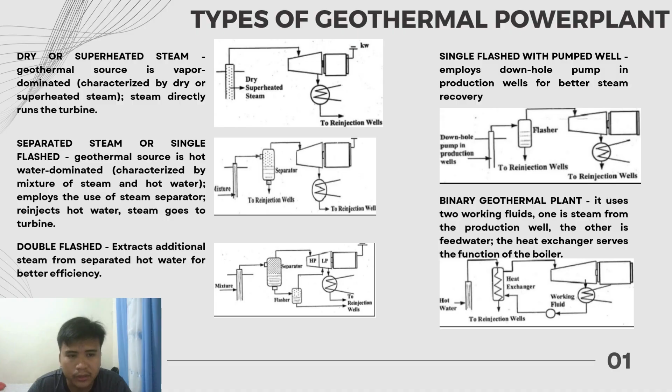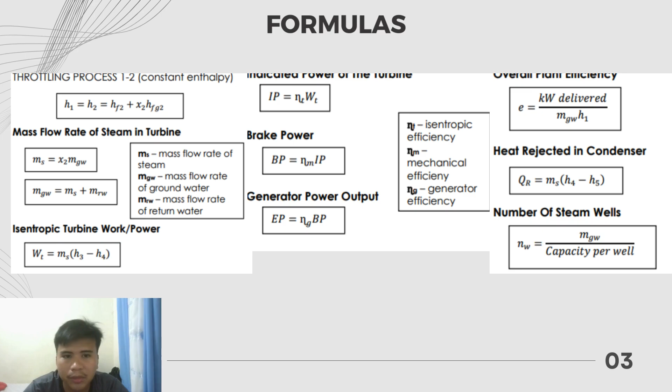For number 1, in a geothermal power plant, the mass flow rate of groundwater is 400 kg per second, and the quality after throttling is 20%. If the turbine power is 80 megawatts, what is the change in enthalpy of steam at the inlet and outlet of the turbine?

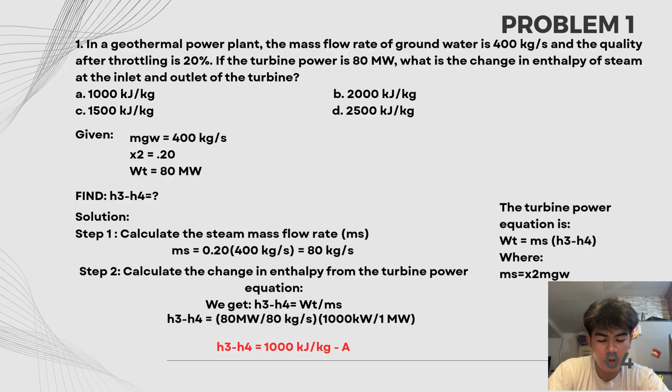Since yung kilowatts natin is kilojoules per second, cancel na lang natin yung seconds sa mga unit. E di magiging unit natin is kilojoules per kilogram. Tas calculate nyo na lang, may calculator naman kayo. Yung magiging sagot natin is 1000 kilojoules per kilogram.

A liquid-dominated geothermal power plant with a single flash separator receives water at 204 degrees Celsius. The separator pressure is 1.04 megapascal. A direct contact condenser operates at 0.034 megapascal. The turbine has a polytropic efficiency of 0.75 for a cycle output of 50 megawatts. What is the mass flow rate of the well water in kilograms per second?

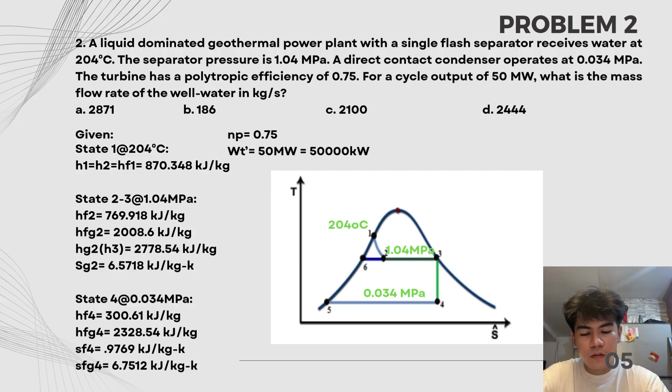Yung hot water at 204 degrees Celsius is mag-enter sa flash separator at 1.04 megapascal. Yung turbine power output is 50 megawatts at meron tayong polytropic efficiency na 75%. Pinapakalculate sa atin yung mass flow rate ng well water. Ayun yung mga given. Sa problem na to may steam table kayo para ma-interpolate nyo yung mga given values.

Yung una natin i-calculate is yung quality after the separator using the formula of throttling process 1 to 2. Tapos derive nyo lang para makuha yung quality after throttling. Tas substitute na lang, tas calculate. Yung magiging sagot is 0.05.

Next is yung outlet enthalpy. From entropy balance formula, pag nakuha na yung X4, gamitin nyo na yung formula ng outlet enthalpy. Same lang din yun sa unang formula. Yung magiging sagot ay 2,230.2711 kilojoules per kilogram. Next natin kukunin yung mass flow rate ng steam using the turbine power equation.

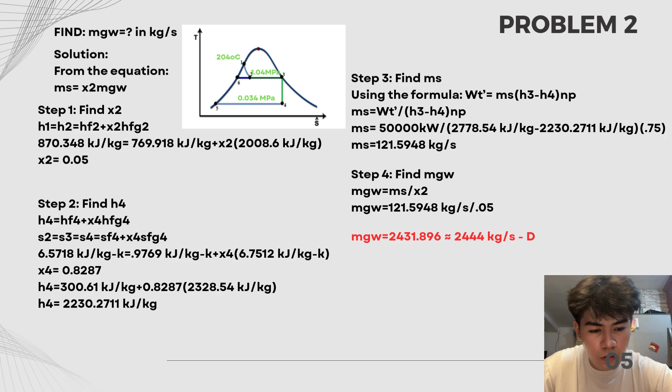Derive nyo lang para ma-solve yung steam mass flow rate. Yung magiging sagot natin is 121.59 kilograms per second. Kompleto na yung mga values para makuha natin yung well water mass flow rate. Gagamitin natin formula is yung sa steam mass flow rate. Yung well water pala, same lang din sa groundwater mass flow rate. Yung final answer natin is 2,431.9, nasa option D. Same lang din yan, basta malapit.

For problem number 3, a flash steam geothermal power plant is located where underground hot water is available as a saturated liquid at 700 kPa. The wellhead pressure is 600 kPa. The flash steam enters the turbine at 500 kPa and expands to 15 kPa when it is condensed. The flow rate from the well is 29.6 kg per second. Determine the mass flow rate of steam in kg per second.

So, first, analyze muna natin siya gamit yung TS diagram. Yung point 1 natin, underground hot water is available as a saturated liquid. Saturated liquid yung left part ng TS diagram, yung right part is the saturated vapor. At 700 kPa. Then yung point 2 to 3, yung flash steam enters the turbine at 500 kPa, kaya dun siya pumasok sa pressure line na yun. Then nag-expand siya sa 15 kPa when it is condensed, process 4 to 5.

For state 1 at 700 kPa, makukuha natin yung enthalpy H1 na equal din sa H2 kasi throttling process is isenthalpic, equals to 697 kilojoule per kilogram. For state 2 to 3, sa steam table ulit: HF2 is 640.09 kilojoule per kilogram. HFG2 is 2,108 kilojoule per kilogram. Yung HG2 equals din sa H3 kasi point 3 nasa saturated vapor line, so Hg na siya, equals 2,748.1 kilojoule per kilogram. Yung SG2 is 6.8207 kilojoule per kilogram Kelvin.

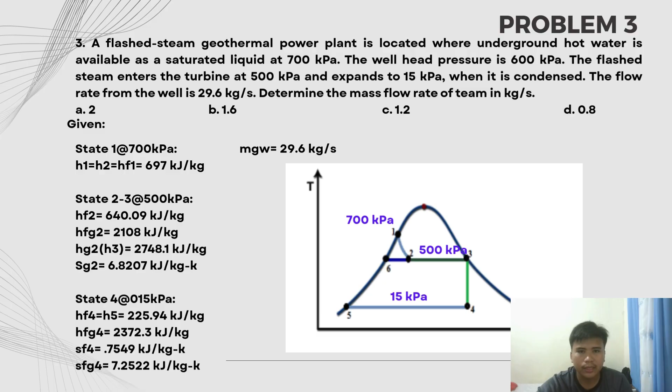So, di ba ang hinahanap natin is the mass flow rate of the steam. So, using the formula, mass flow rate ng steam is equals to yung quality ni 2 times mass ni groundwater. So, step 1 natin is finding the quality of 2. By using the formula, H1 is equals to H2 is equals to HF2 plus X2 HFG2.

So, substituting yung mga values na nakuha natin kanina, yung H1 natin na equals to H2, 697. Tapos HF2 natin, 640.09 plus X2 na unknown. Then yung HFG2 natin kanina na 2,108. Then makukuha natin dito yung X2 na 0.027. Since may quality na tayo, mahanap na natin yung mass flow rate ni steam.

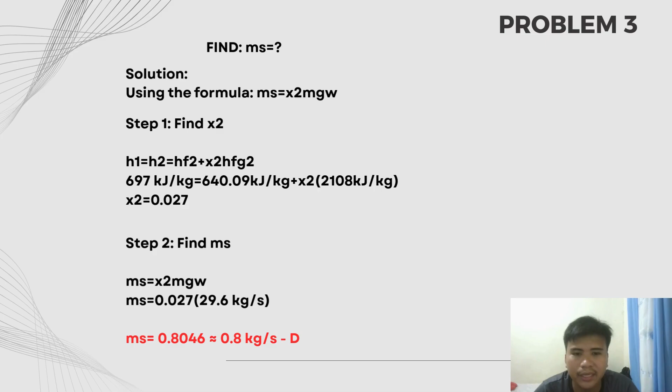Then substitute lang natin sa formula, 0.027 times 29.6 kg per second. Ang magiging sagot natin ay 0.8046 or almost equal lang din siya sa 0.8 kg per second or letter D. So, that's problem number 3.

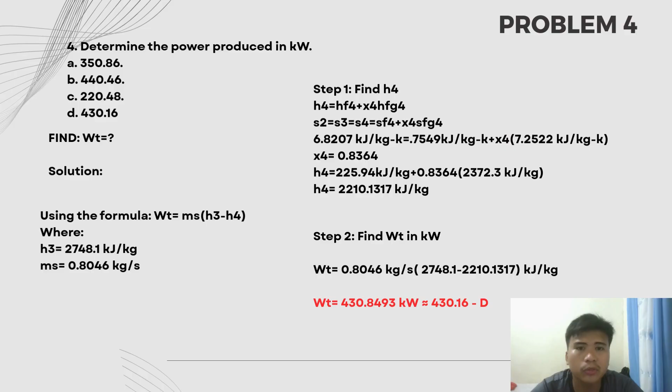So, kadugtong pala to ng problem number 3 kanina. So, may mga given na tayo doon and mga nakuhang values using steam table. Then, ang hinanap dito is determine the power produced in kilowatts. Power produced, saan ba napuproduce yung power? So, sa turbine, di ba? Work ng turbine.

So, for the formula of turbine, it is equals to mass ng steam times H3 minus H4. Yung H3 nating nakuha kanina is equals sa Hg2. Hg2 is the saturated vapor at 500 kilopascal. So, yung MS, yung nakuha din natin kanina na 0.8046 kg per second.

So, meron tayong MS, meron tayong H3, pero wala tayong H4. So, paano natin kukuhanin yung H4? Yung formula lang din kagaya ng pagkuha ng ibang enthalpy. H4 is equals to HF4 plus X4 HFG4. Pero, wala tayo ng X4, yung quality ng 4. So, magpuproceed tayo sa pagkuha ng X4 gamit yung entropy.

Pero wala tayong entropy ni 4. Pero pwede natin siya kunin gamit yung entropy ni 2 kasi equal lang si entropy ni 2 tsaka entropy ni 3. Since isentropic process siya, equal din siya sa entropy ni 4. So, yung nakuha nating entropy ni 2 is equals to 6.8207. Then, equals to SF4 na 0.7549 plus yung X4 na unknown, times SFG4 na 7.2522. Then, makukuha na natin yung quality ni 4 na 0.8364.

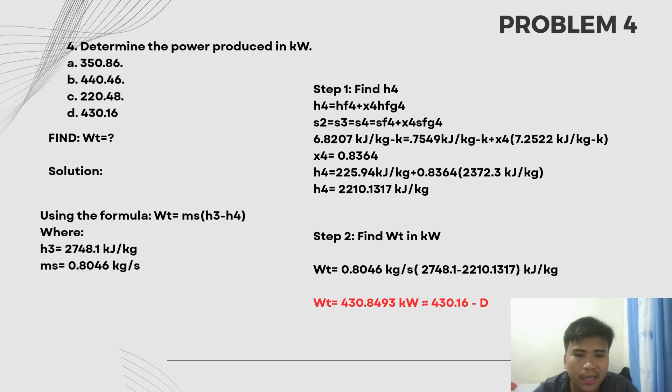MS is equals to 0.8046 kg per second times yung H3 natin na 2748.1 minus 2,210.1317 kilojoule per kilogram. Then, makakancel yung kg. Matitira yung kilojoule per second, magiging kilowatt. Then yung final answer natin is 430.8493 kilowatts. And almost equal din sa 430.16 kilowatts or letter D.

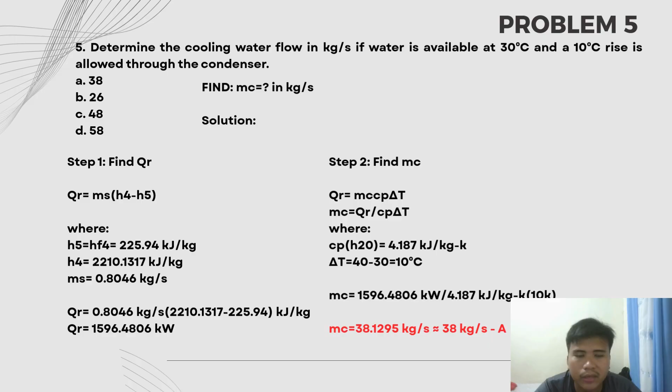So, substituting the value, MC is equals to 1,596.4806 kilowatts over 4.187 kJ per kilogram Kelvin times 10 Kelvin. Makakancel yung Kelvin, then makakancel yung kilojoule, matitira yung kilogram per second. And yung final answer natin is 38.1295 kg per second. And almost equal siya sa 38 kg per second. And letter A yung magiging sagot natin dito. So that's all for the geothermal power plant.